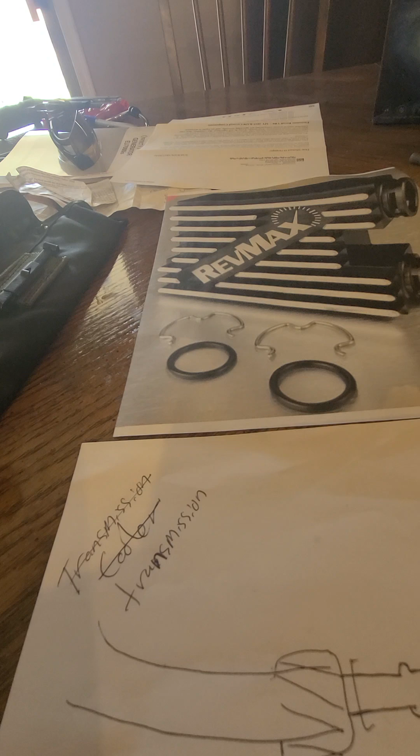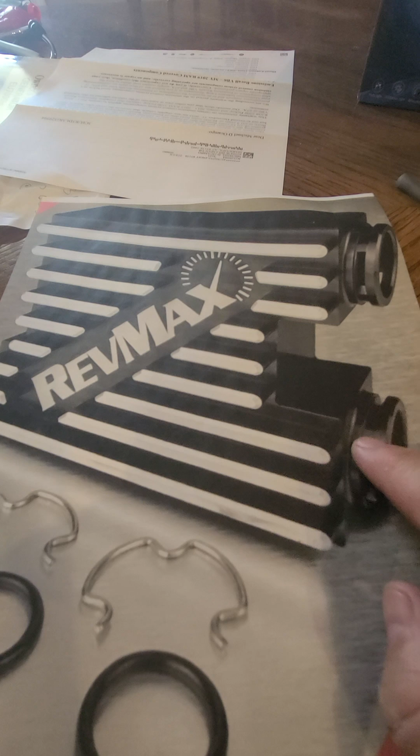So this is an update on my installing the Revmax thermostatic bypass valve on a 68RFE transmission in a 2018 Ram 2500, 6.7 Cummins. As I mentioned, it's a 68RFE transmission. So this is like a 5-minute job, you know. Yeah, right.

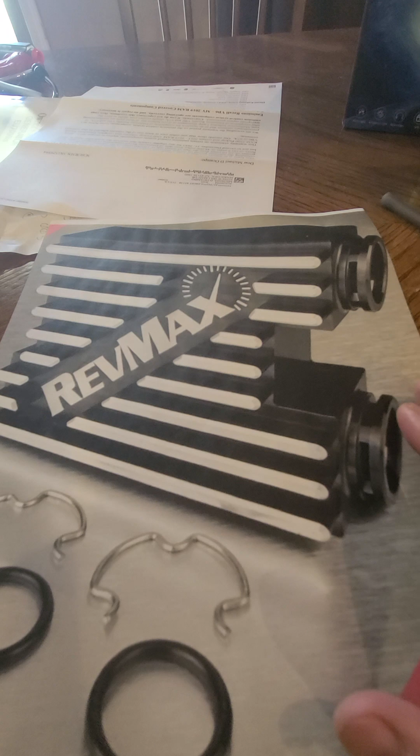So I went ahead and installed it yesterday. It was 107 degrees out. Oh man, it was radical. But I popped it out, popped it in, and I had problems.

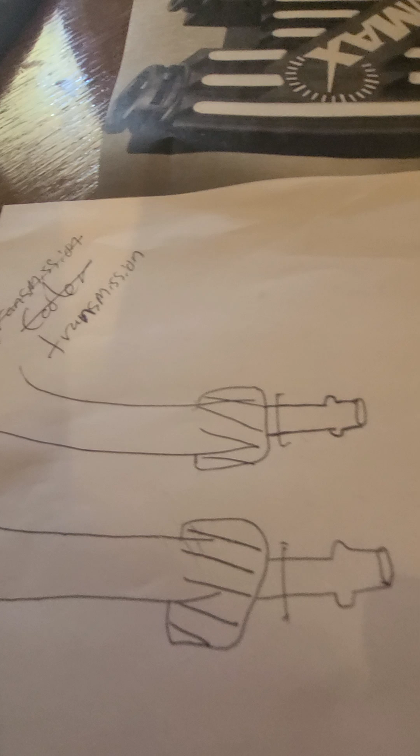So I am going to rotate this around because it's going to fit my diagram here a little bit better. Coming out of the transmission, you have these quick disconnect lines or push-in lines that push into the thermostatic bypass right here. You have these two lines that go to the transmission cooler.

So in this bypass, what's happening is when your transmission is cold, the tranny fluid is coming in. I'm not sure if it's coming in the bottom or top, but it's coming in from either the torque converter or the tranny, and then it gets cycled right back down to the bottom, right back out to the transmission. So the fluid, when it's cold, does not come out of this side, and it's not hitting your cooler. Apparently they did that to save you money on gas, so I guess you don't have to idle as much or something like that.

Well, some of the things I'm reading is that the pressure or temperature valve in here can stick or fail, and so it'll never open up to allow the fluid to go into your cooler. So your transmission fluid is not getting cool when you're using the original manufacturer's bypass valve.

So in the Revmax, these are drilled out. There's no valve or nothing in here, so the fluid runs straight through. It hits your cooler, comes back, goes straight into the transmission, which to me makes sense. Like, yeah dude, I want my stuff to hit the cooler. I don't care what temperature it is.

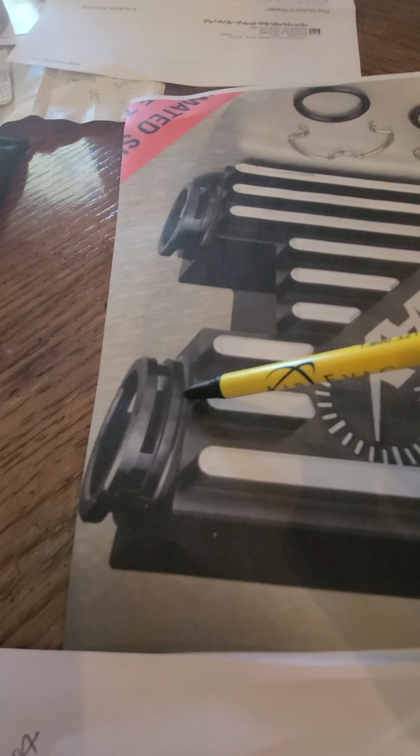So you take the clips, you put one clip here, one clip there. You go ahead and tighten these down to 20 foot-pounds. You'll need a crow's foot or something like that. But yeah, I didn't have a 20 millimeter claw socket or whatever, so I used a 13/16 wrench, and I just kind of got them snug, but not too crazy.

These seals can be replaced. I always recommend you remove them and put new ones, but you got to buy the whole part to get this from the dealer, and everywhere else doesn't have them. AutoZone and everywhere else I called didn't have them.

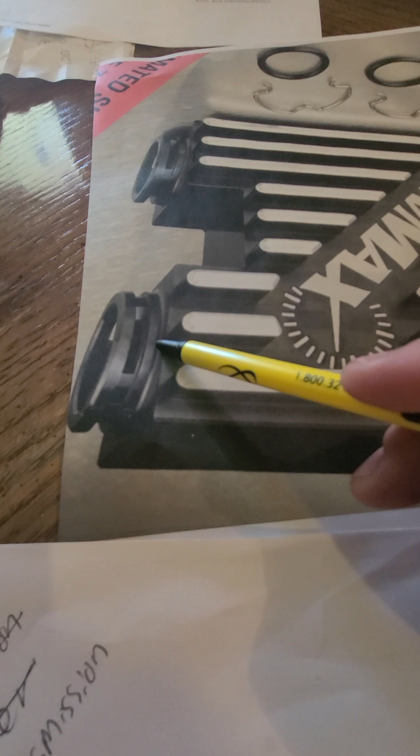So once I got it all buttoned up, I started running the truck, and I instantly had a leak out of here, right away. It was coming out. If I would have left that truck running, I don't know, 30 minutes to an hour, I think the transmission probably would have been empty.

So I wiggled the lines manually with my hand to see if they would seat better. No big deal, it just kept on leaking on out.

So I'm like, shoot, because it was 107 degrees, did I cut corners? Did I do something wrong? Like, what did I do? But I didn't like the fact that it was leaking, so I killed the vehicle, and I pulled this off. I wasn't even up to temperature, so I couldn't imagine this being up to temperature and pressures and all that, shifting like what it would have done.

I said, well, I can't just let all the fluid drain out. I'm like, shit man, that ATF4, I had to get it ordered in. But anyways, I said, well, I got to put the original manufacturer part back in, because I was thinking maybe I monkeyed these lines up. Maybe I damaged them, right? Just because it was hot and trying to flop it in there, try not to lose all my fluid, and maybe I did something wrong.

So I pulled out the RevMax guy, I put in the original manufacturer part, and what I noticed, as soon as I slid these lines into the original manufacturer part, it was very snug. It was actually hard to get these lines to go in because they were very snug, right? But I fed them in, and I felt them bottom out. So I like that when I bottom out, shit.

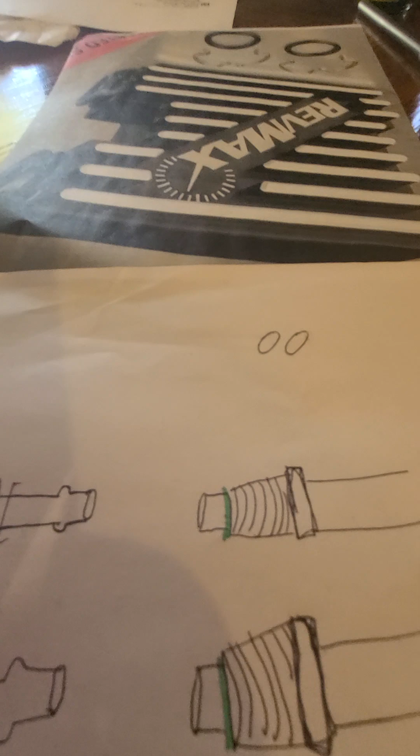I got it all pulled out. What I'd recommend is taking these clips and putting them into the RevMax first before you put it into the truck. So just clip these onto here. I did that, got under there, pulled off the original manufacturer part and popped it out. It started leaking. I put the RevMax in, connected it, boom, got it right in. Like I said, I'm getting good at this.

But when I went to put these lines in, they are just sloppy, man, going into here. So I followed through, put it in, put the clips in, tightened it down, wiped it all off, and it's leaking, not even running. It was leaking, you could see it coming right out of here. There's little caps that push over this that hold those rings in place. So it's just leaking right out, running down this rib, dripping off over here.

And I said, well, maybe if I get a little flow, maybe it'll seat or do something mysterious. So I started up the truck, and nope, it started coming out more.

So I'm going to walk out to the truck, I'll show you what this looks like. This is from last night, and then I emailed RevMax to see what the hell's going on, and I have not gotten a return email from them. So that tells me they probably know their shit is bullshit, and they don't want to talk to me.

They're just like, fuck you, you got your $100, you fucking deal with it.

So let's see what I can do for you. Ooh, it's hot out here. Oh, I'm gonna lay on this hot pavement. Oh, god damn, it's hot.

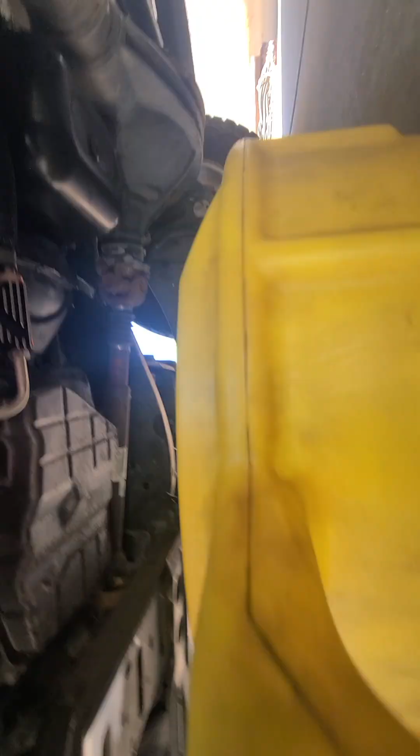Okay, so you can see where it's leaking, right where that white cap is. It leaks and then runs down this way to these pipes. And there's the fluid that's leaked out since last night. And then I ran it this morning shortly just to see if it was still going to be leaking, and it is.

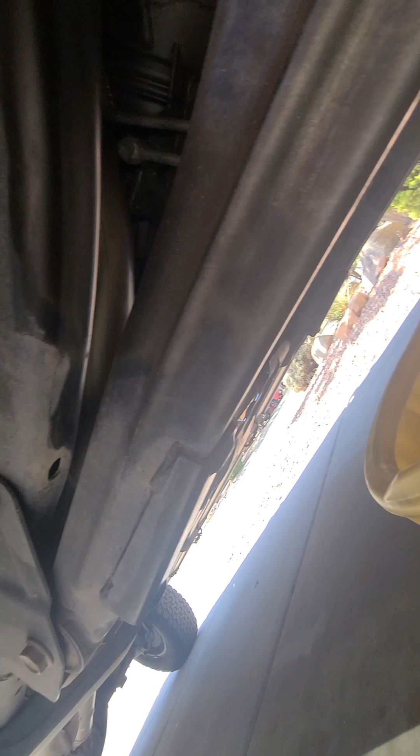When I started looking at my invoice, I realized I had purchased this from Amazon. I thought I bought it directly from RevMax. One of the videos I was referencing was called Thoroughbred Chevrolet out of East Coast somewhere.

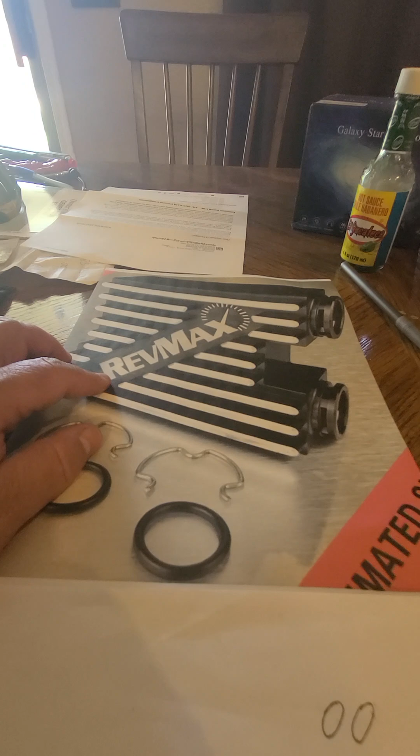So I called those suckers up to see what's going on, like have they ever had a problem with this, because they were saying yeah, this is the way to go. I called a couple local shops around here in Arizona, and nobody knows about RevMax. A couple of the diesel shops, they're like, what are you talking about? A couple high performance shops didn't know about RevMax either. I'm like, really? I don't know, sounds like it's a pretty common redneck thing. RevMax, redneck, I don't know.

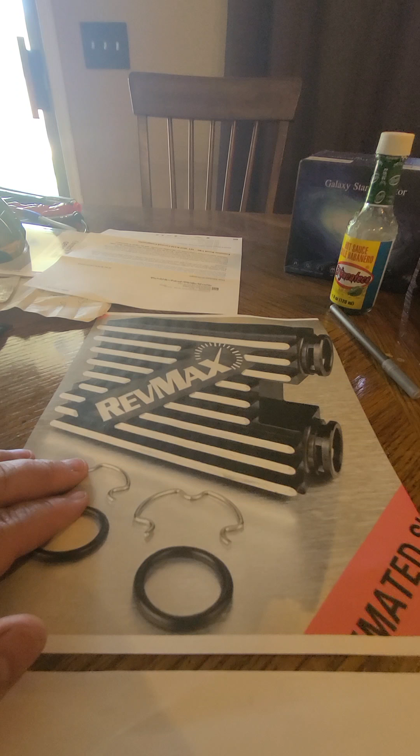Anyways, the guy at Thoroughbred Chevrolet back east, he's like, dude, I've put in hundreds of these. I only had a problem on one. And he goes, we just got another one, slapped it in, no problem. He said it's like a 5-minute job.

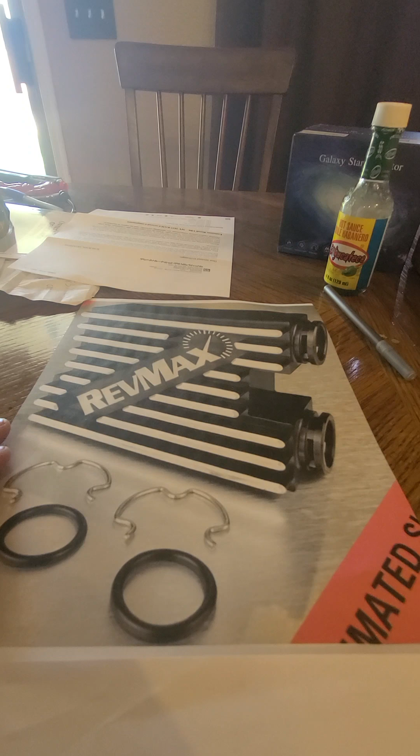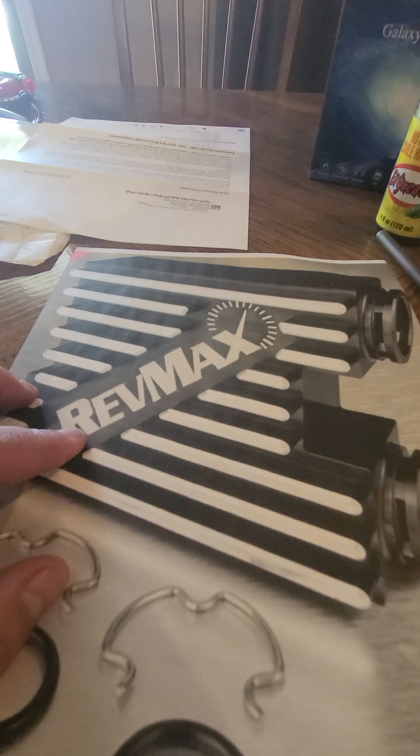And then I told him what my issue was, and I said, well, you know what, man, I did buy it off of Amazon. Then he goes, oh man. I go, yeah, I know. I don't like to buy critical parts from Amazon, but all this is machined out, like what could be going on? So he's thinking this could be a knockoff, that maybe it came from China and they knocked it off. And I mean, it looks RevMax, it looks official.

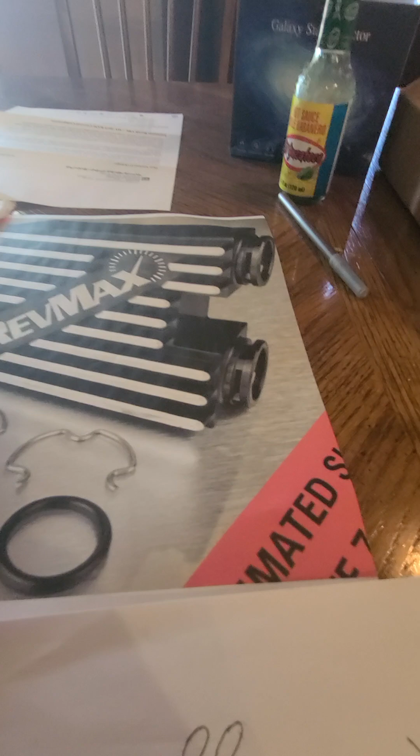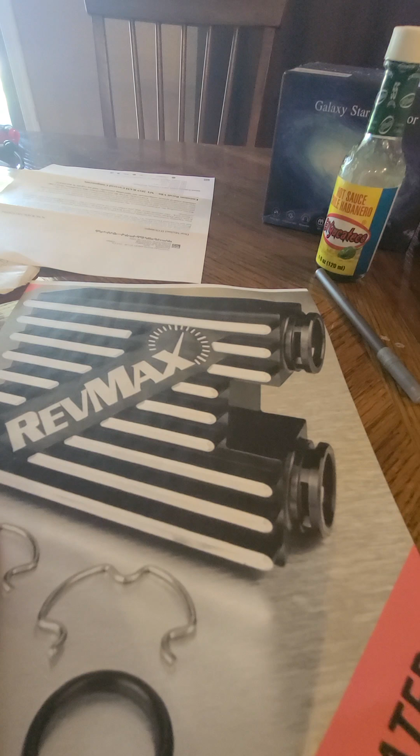You go to their website, it looks like the real deal. That's the only thing he can think of. I told him how sloppy the lines were when I put them in, and he says he doesn't recall that. He feels all the ones he plugged in were no problem. I said, well, it's a 68RFE, any concern? He's like, no, that's what it's for. He gave me another option, ATS or something like that, but he was standing behind RevMax. He's like, dude, that's a quality part, so I don't know what your problem is.

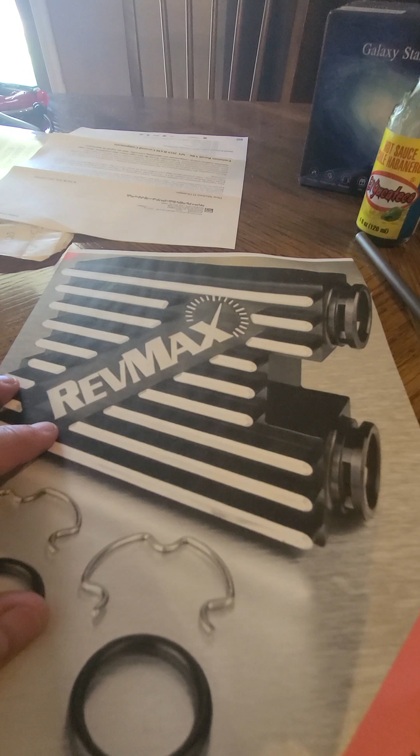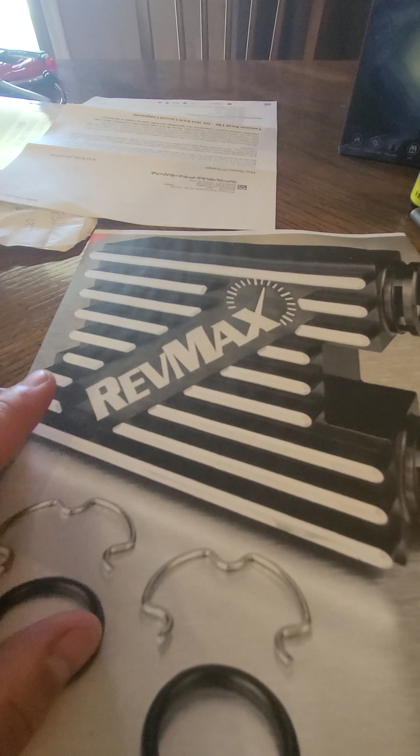So he said he'd be happy to get me ATS, but he did say this RevMax style thermostatic bypass is on back order, which is what this red line said. I just cut the picture out so you could see it. He's saying these are on back order, so how did I get one? So he's thinking it's a knockoff. I don't know, looks pretty legit to me.

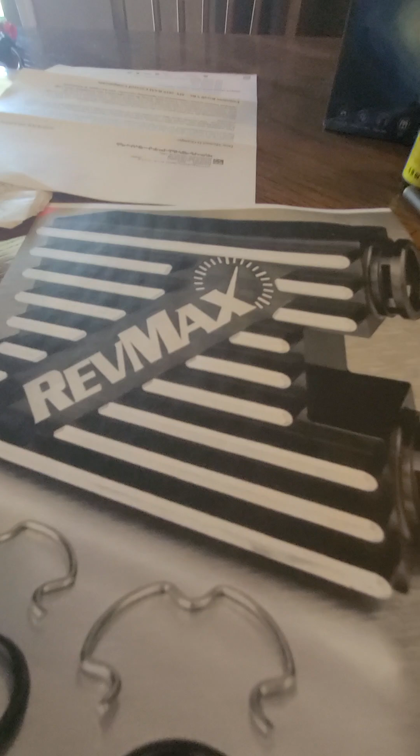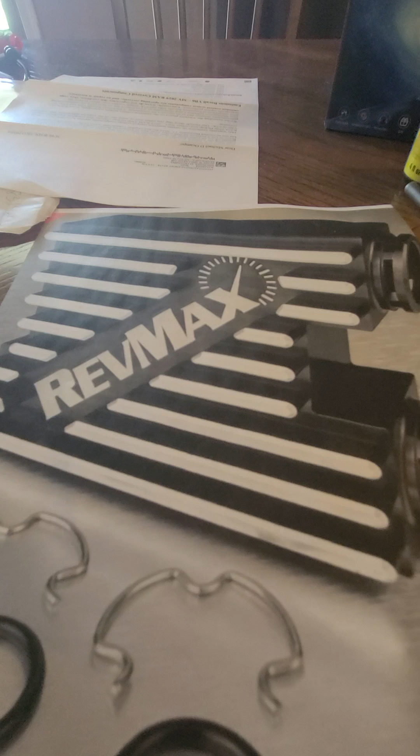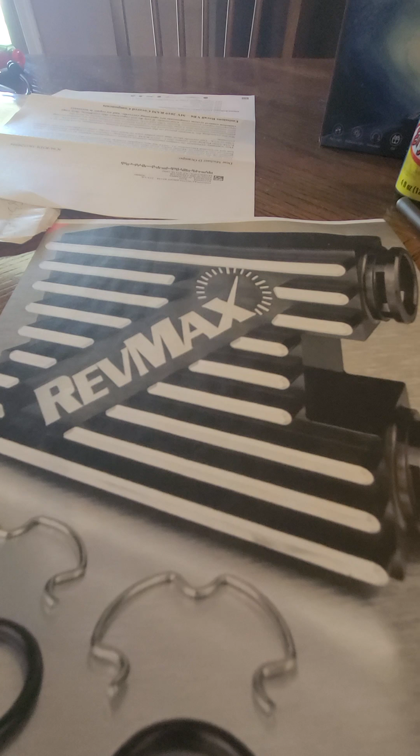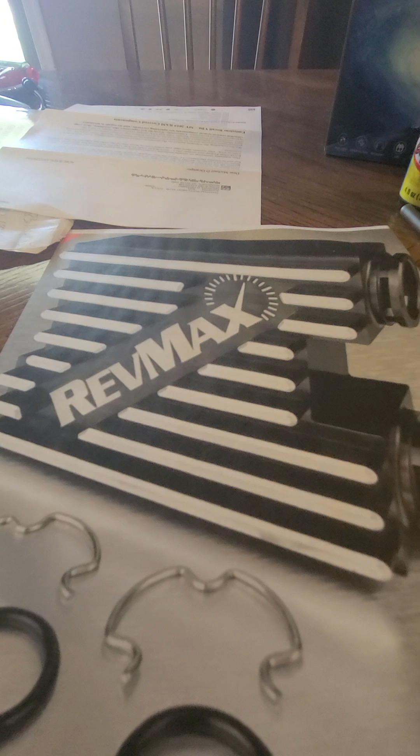So anyways, I have not heard back from RevMax, they haven't given me any additional input. I called my tranny guy and said, hey brother, just do whatever you would do, I don't care if it's RevMax or not. I know it's a 5-minute repair. The dealer wants $300 for the original manufacturer piece, but I'm thinking the piece ain't monkeyed up, it's just how it is. But I called my service advisor and we started talking about it, and he says, I don't even know what you're talking about, man, I've never heard that. So I'm thinking maybe those things don't fail, that's just how they are. But I figured he would say, oh yeah Mike, those things, we have problems, we swap them out. But no, he didn't even know what I was talking about when I brought it up.

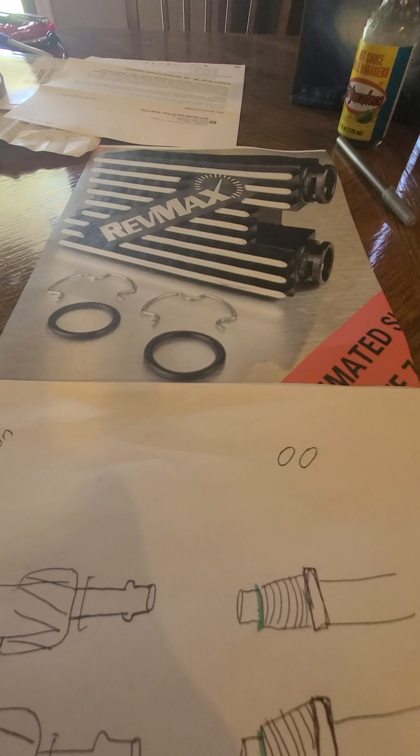So that's it on the RevMax. I'm in a holding pattern, I'm going to have my transmission guy handle it. I just said, dude, change the fluid. I know it's only been 20,000 miles. Change the fluid, change the filters, it's after the rebuild, I don't even care. Charge me $1,000, $10,000, I don't care. He said $200, I said fine, do it.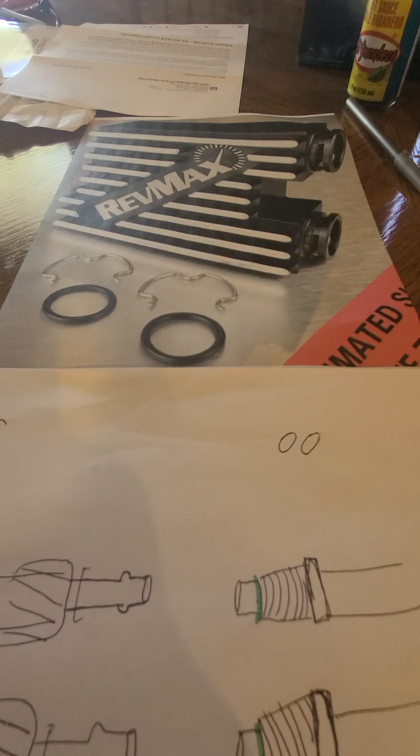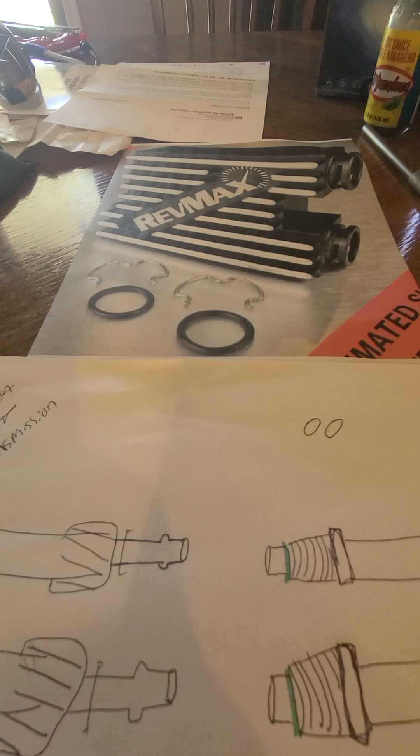Anyways, he's reasonable, he's a reasonable guy. I just said I need another set of hands on this, maybe I'm doing something weird, I don't know. So he's going to check his distributor for RevMax, and he says, yeah, I don't know about that Amazon stuff. And he's going to get the fluid and all that stuff and charge me two times the going rate and kick me in the ass. And I said great, let me provide the boot with the steel toe, man. Go to town, get it on, get it on.

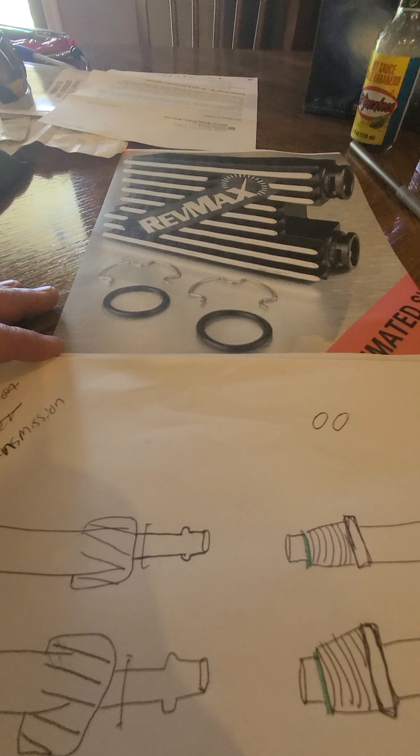So yeah, the Ram's out of commission, man. I don't want to get under there, I could throw the original part back in and put her back into service so I can do my Ram stuff in the next couple days. But I'm taking it to him on Wednesday, and he's usually pretty quick, he'll probably have it done Wednesday, but I told him I don't want it back till Friday. Take your time, do what you got to do, like I always do. It's not like I need the Ram, and I don't know, dude.

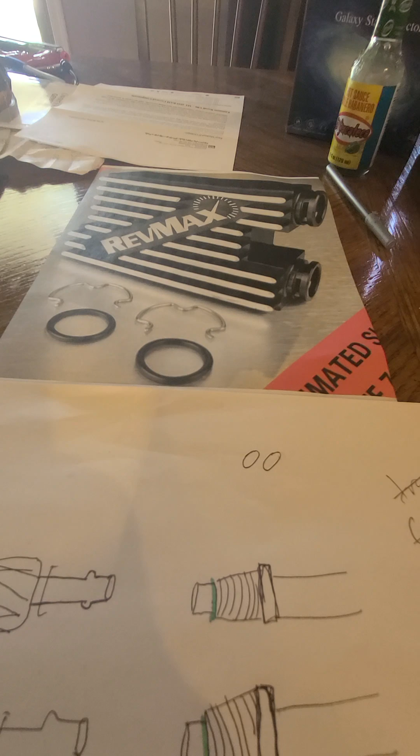I love Ram as far as towing, man, they tow like champs. But dude, for a $67,000 vehicle, it's a lot of bullshit with these trucks, man. I don't know, man. I've always been a GMC guy, and if I had $90,000 I probably would buy the AT4. But I don't know why people love this Dodge products. It's always something with this damn Ram. Maybe I'm being too over diligent with it, maybe I should just run it until it does explode. I don't know, but that's all I got to report today, folks.